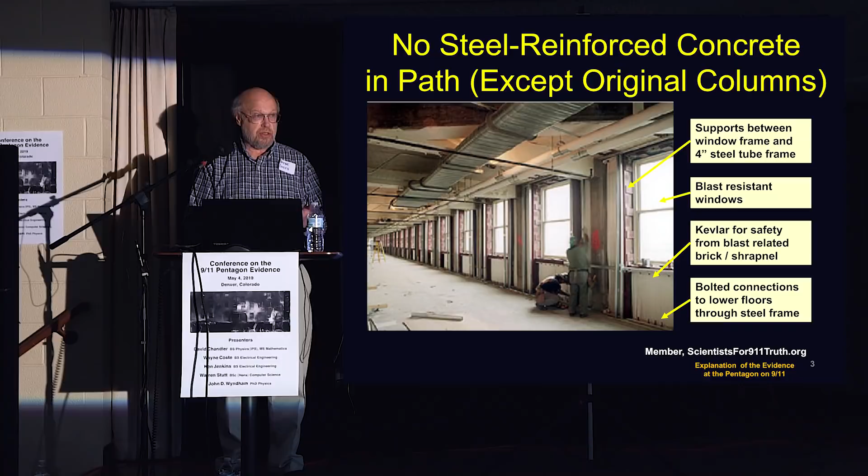The first thing I want to do is talk about the blast-resistant wall, the E-ring wall. It is a very significant piece. What the refurbishment of the E-ring was primarily designed to do, besides modernizing it, was to put in a blast-resistant wall. The blast-resistant wall was basically blast-resistant glass to protect against incidents like the Khobar Towers, in which the explosion shattered the glass, and the projectiles did the most damage to the personnel inside.

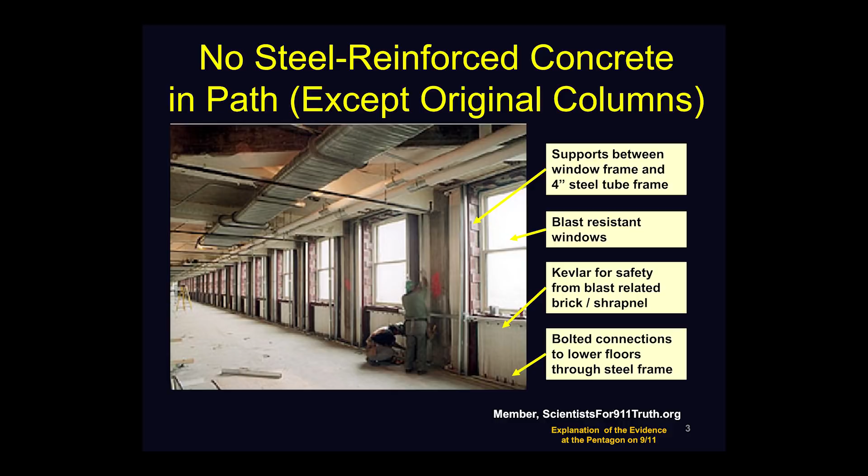So they put the blast-resistant windows in. They were supported by 4-inch steel tubes with fingers that are holding them up. You can see kind of the fingers, the little horizontal things that are pointed to in this video. They're also bolted from one floor to the next, like window frame, whole entire frames that are put in place and then bolted using threaded rods down to the next level down. That's how they used that for lateral support. It was designed against an exterior truck bomb, not an incoming plane.

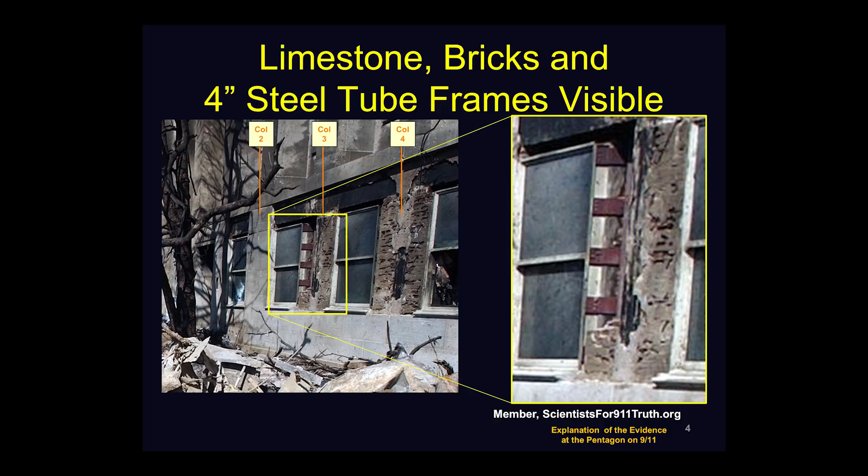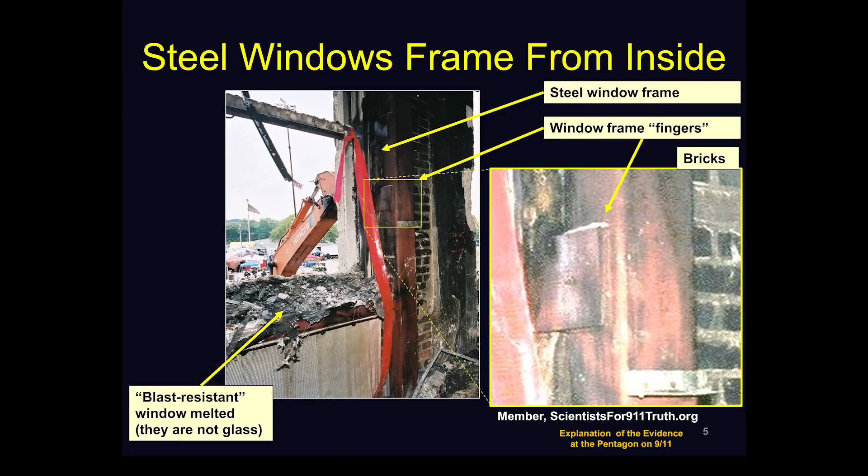Here is a post-impact picture of about columns 2, 3, and 4. You can see one of the window frames, and I've highlighted the fingers so you can see what they look like. This is typical. If we go on the inside, this is a second floor window. You can see the glass is melted, and if you look on the right-hand side, you can see the finger that's there. You can also see the infill brick. There's no steel reinforced concrete anyplace in this entire path, as was mentioned before, going from the E-ring all the way to the C-ring. It was just the 1942 era steel and rebar columns that was obstructing the path of the plane.

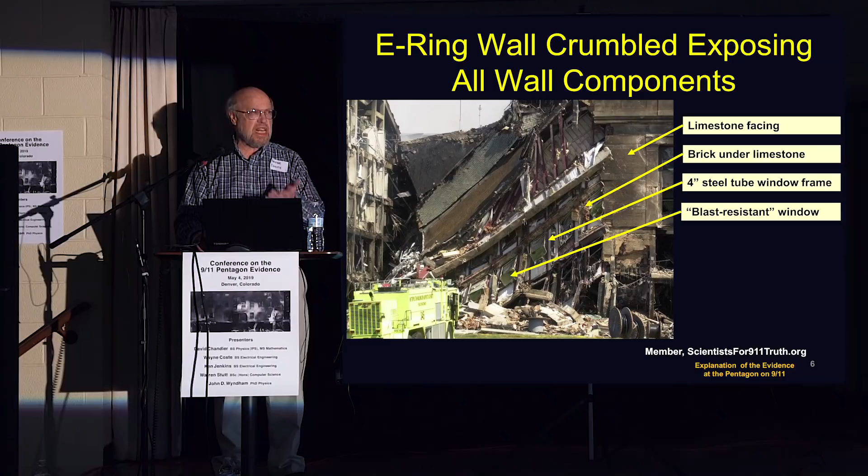When I used to bemoan the fact that the wall had collapsed and it was a pile of junk, you can't see anything, there's nothing there, there's no information. But that is not true once you look. Once you know what you're looking for, you can identify. First of all, we got the limestone facing. We got brick under the limestone. We've got the 4-inch steel tubes that are clearly visible. You see the blast-resistant window. It's all there. It's just kind of not in the right place, the original place. So it's all there. You can see it, and you can see that there's no steel reinforced concrete, no concrete at all in this area. The only place there's any concrete is in the stairwell.

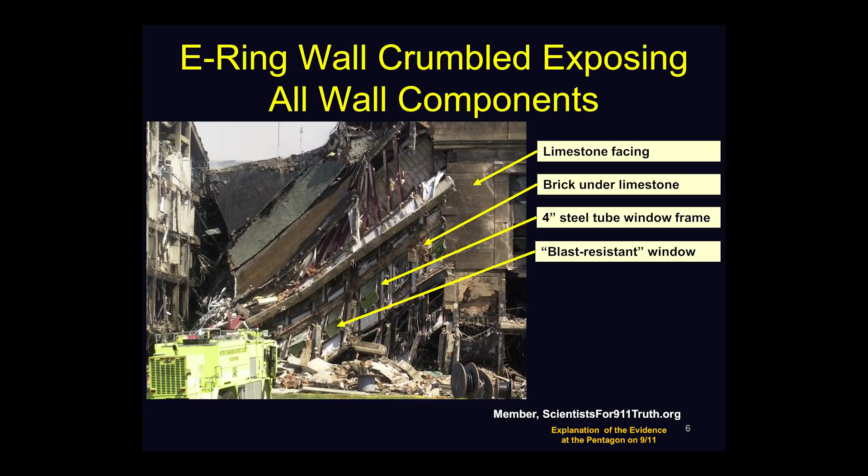Appears to be in the stairwell, which is that blank wall on the right-hand side at the right side of the collapse. So a little bit of orientation.

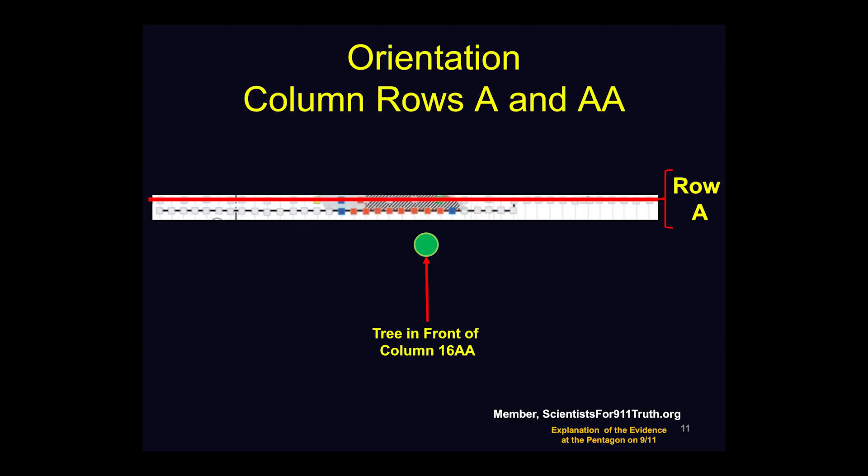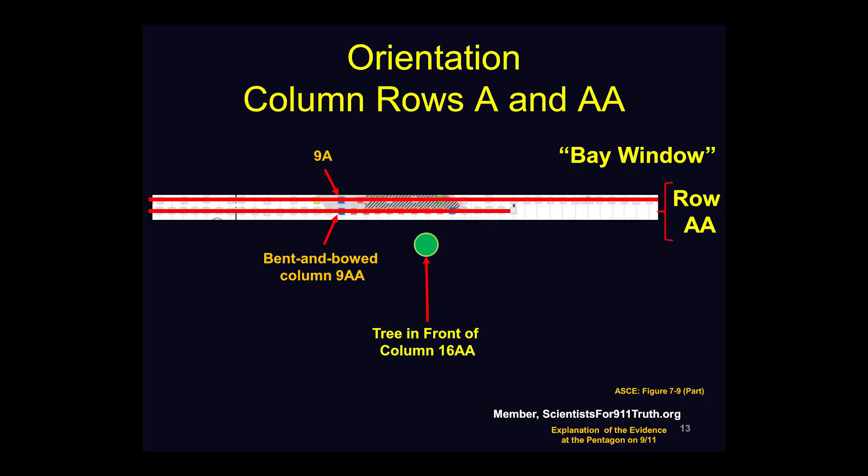This is row AA, and I'm going to just highlight a couple of columns we're going to talk about. Column 9A, which is in the second row, the bent-and-bowed column 9AA. There's a column that is severed and hanging called 10A, and then there's two at the right side of the plane impact area, 18AA and 19AA. So those are just giving you a little bit of orientation.

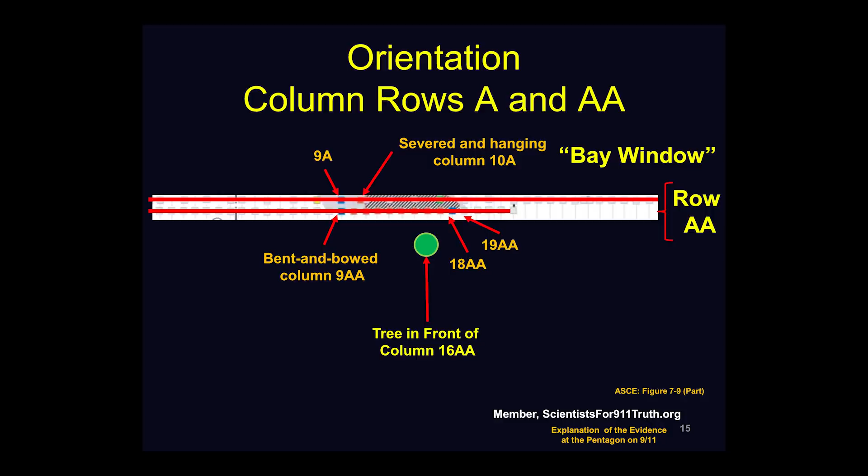And again, we've got the generator, diesel generator trailer, the retaining wall, and the tree in front of column 16. I'm going to be talking about the tree at column 16.

The tree was there, photographed in many, many places, but then it disappeared from memory. Once 9/11 happened, no one even knew it was there. It wasn't until I saw, must have been about the 20th time, the comment that, oh, there's a stump. What stump? What's a stump doing there? So I looked into it.

And over the course of 6 months or a year, I finally figured out how I could explain what happened. Nothing is obvious with the photos that were there, but once you see it, once you can explain it, it's there. So here's the plane approaching.

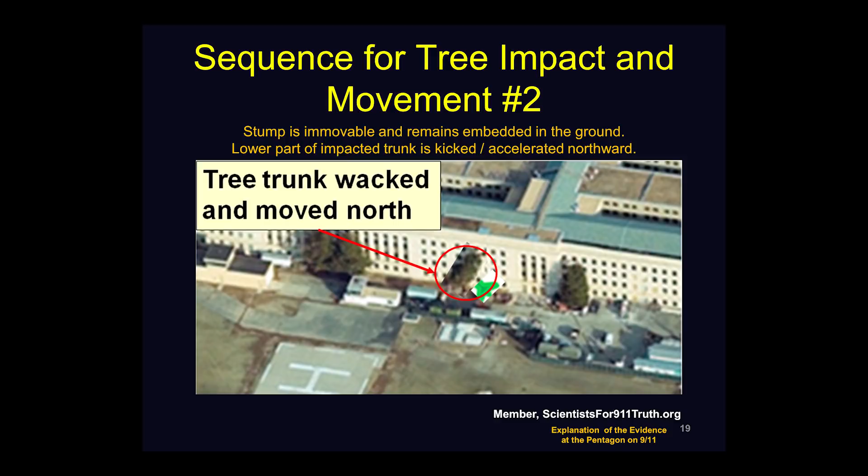It's going to hit the tree and sever it between the fuselage and the right wing. The tree is going to get severed. The trunk is going to get whacked. It's effectively going to hit the wall and kind of bounce back through the plane, dragging along some parts of the plane.

The moving mass of the trunk, with momentum, is going to be dragging the top of the tree and everything to the right, and it's going to end up about as far as column 5.

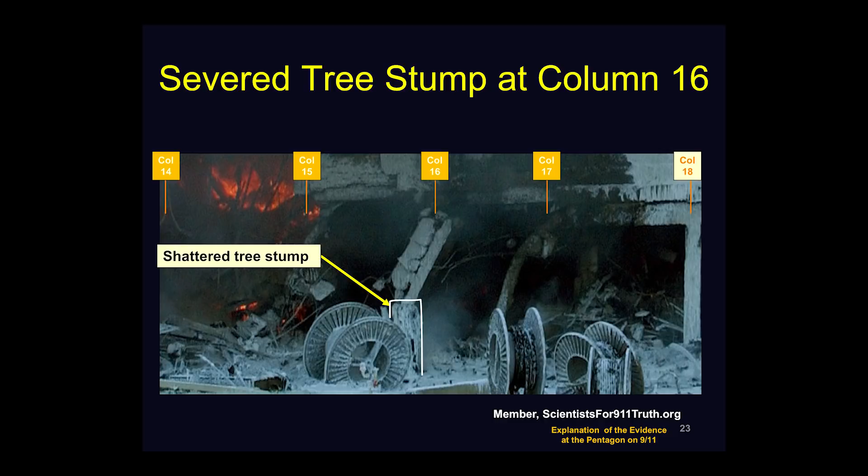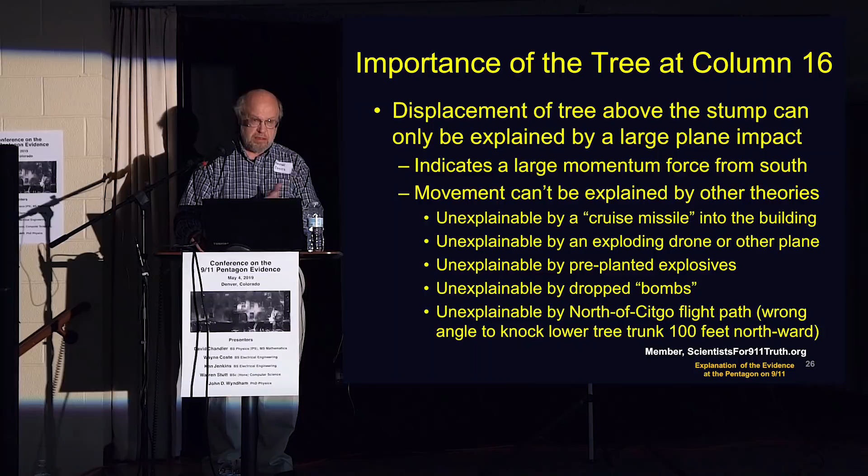So the importance of the tree at column 16 is that the displacement can only be explained by a large plane impact. The movement of this tree can't be explained by the other theories. It's unexplainable by a cruise missile, exploding drone or other plane, unexplainable by pre-planted explosives inside or outside, unexplainable by dropped bombs, unexplainable by a north of Citgo flight path, at least the version that hits the Pentagon, because it would pin the tree to the wall and not kick it to the north because it's got the wrong angle on it. So I'm going to go over the plane approach.

You've actually seen this type of stuff with the other presenters. But what we see here is the plane's coming in. It's going to hit the diesel generator trailer.

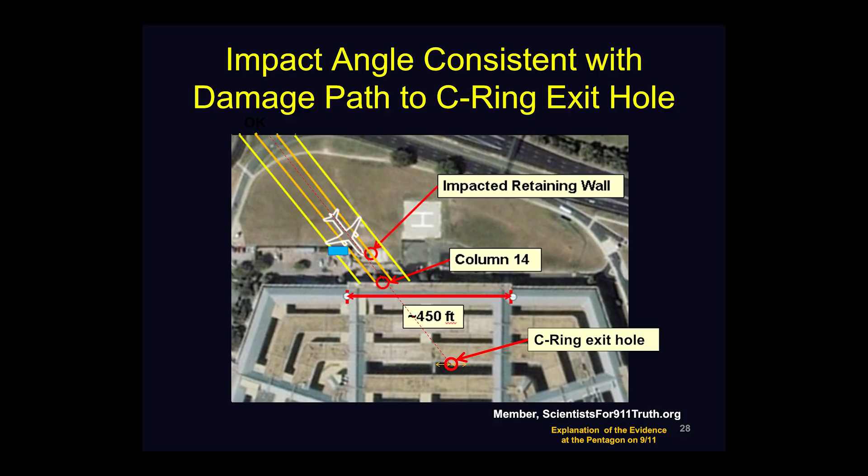If you follow it, you go to the C-ring exit hole. Everything kind of lines up, as you've seen before. But here's the diesel generator trailer getting hit.

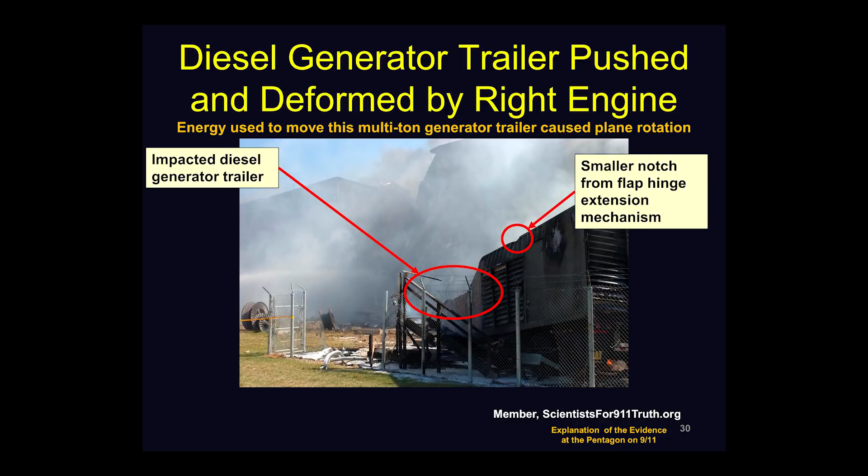You've seen this before. I've got the small notch that David had just alluded to at the top. If you take a look at the left engine that now hits the ground at the retaining wall, it takes out a gouge. You've seen this before.

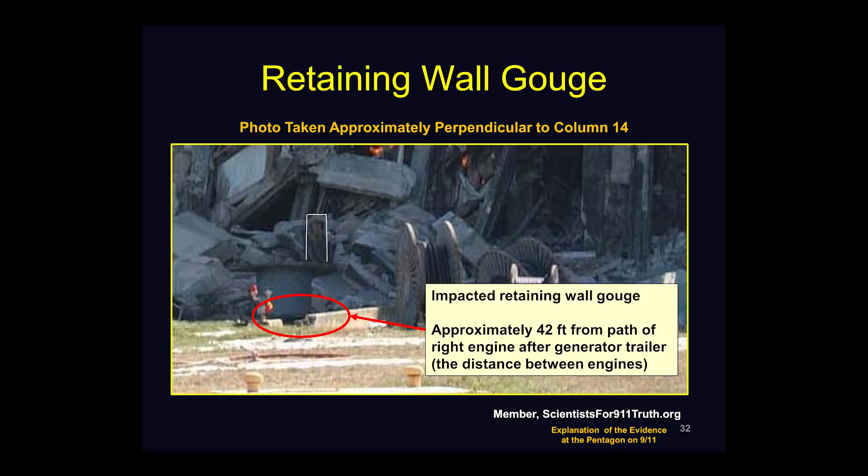I started to accept the possibility of a large plane impact when I was putting together a series to describe the four different competing theories for what happened at the Pentagon, and my intention was to ridicule a large plane impact. It wasn't part of my vocabulary then.

But the fact that made me stop was that this is 42 feet from where the generator engine, the area where the generator trailer would have hit. And that made me stop. Who could arrange this stuff and fake it this well? I had to at least start looking a little bit harder.

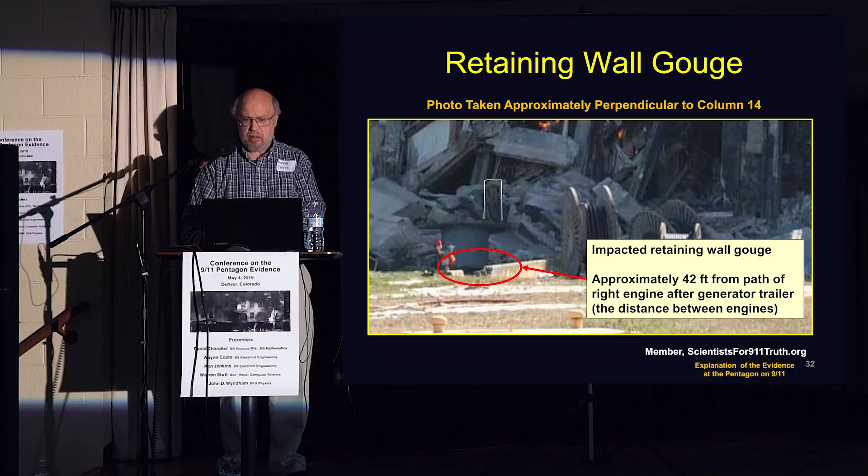And so this is the picture that got me going, this one in the dimensions. So I'm going to take a look at the plane impact onto the facade.

First of all, we're going to see the right wing is going to be impacting above the second floor slab. The tree stump we're going to use to set the height of the wing spar between the fuselage and the right engine. The left wing is going to impact entirely below the second floor slab, and that's documented, memorialized by the bent and bowed column 9AA.

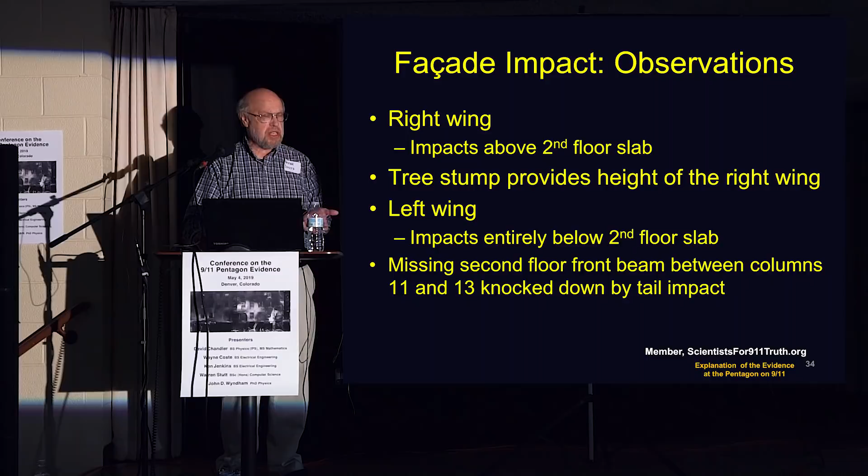And we're going to also look at this missing second floor front beam that's between columns 11 and 13 that was taken down, it appears, by the tail impact as the tail is dragged in.

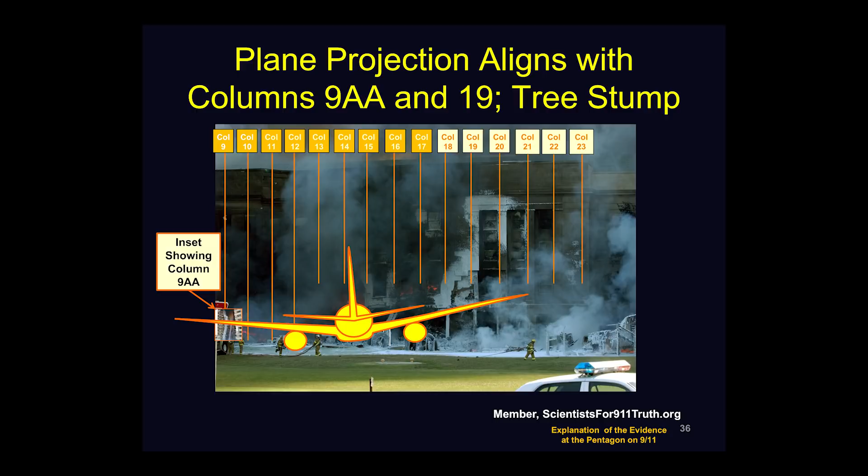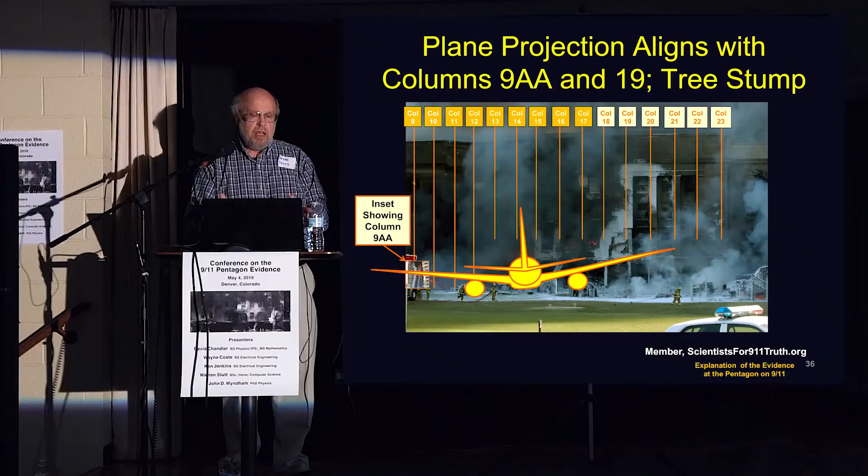I took the width of a 757, put it in at the right angle. I reduced the angle a little bit to 52 degrees, to account for the yaw rotation that we'll talk about a little bit later.

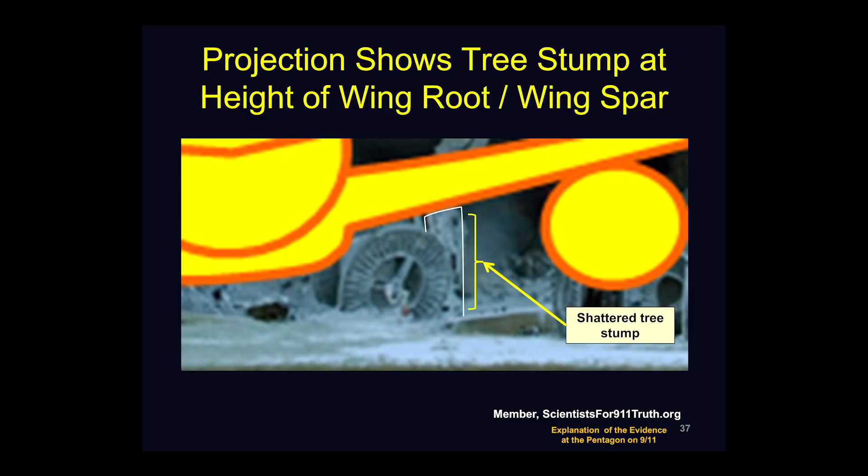And so here's the shattered tree stump being used to set this part of the image for the wing between the fuselage and the right engine.

On the very right-hand side, what you see is there are some bashed-in columns and knocked away limestone that sets really the height of the wing at column 18, at the intersection of the slab; column 19 about a foot and a half or so above; and column 20 about 3 feet or so.

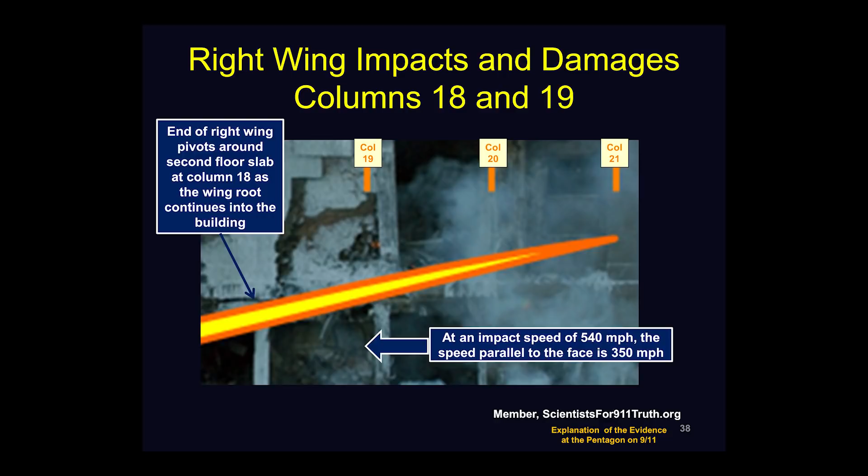Column 21 is missed, and so that's where I determined the end of the plane would be.

So on the right side, what we're going to see is there's bashed-in columns on 18, 19, and 20, evidence of a large momentum impact, and again, it can't be explained by exterior explosives, interior explosives, or cruise missiles. As a further comment, both engines' impacts are approximately horizontal, so there's no seismic activity, as the plane's energy is being absorbed column by column over some time.

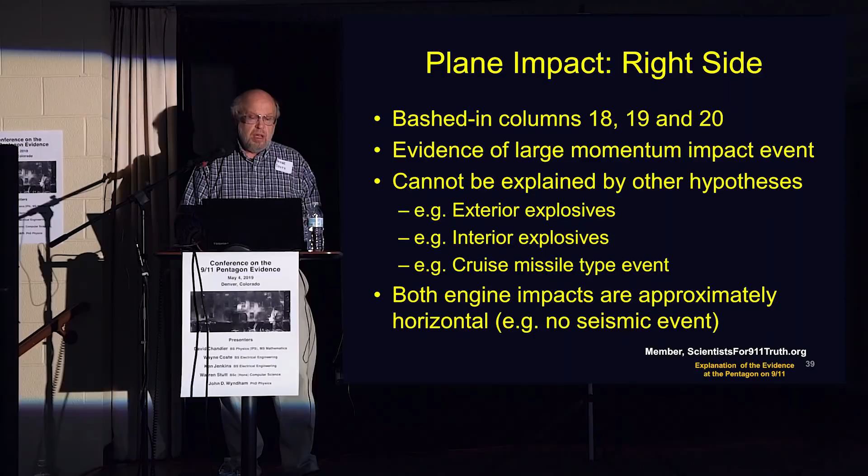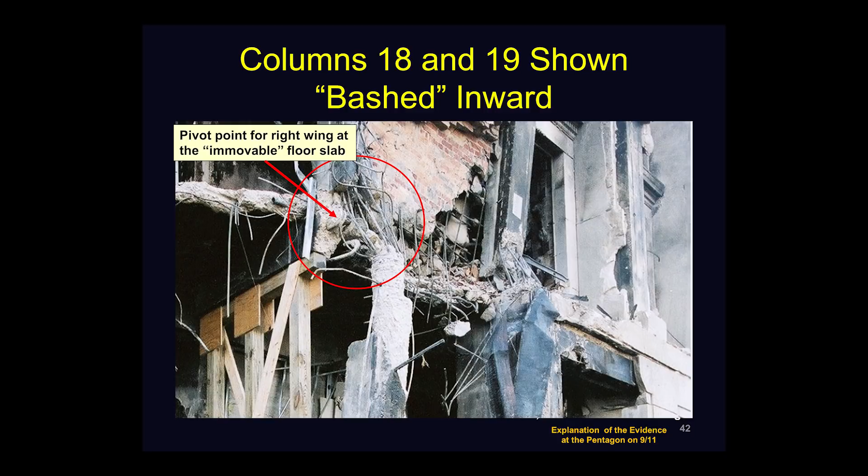Here's another view of it. You can actually see how far it's been pushed in, and you can see the rebar is still attached to it. And then on the left-hand side, you can see column 18, which has not only been squashed and bashed against the slab and destroyed in that way, it's also pushed to the left.

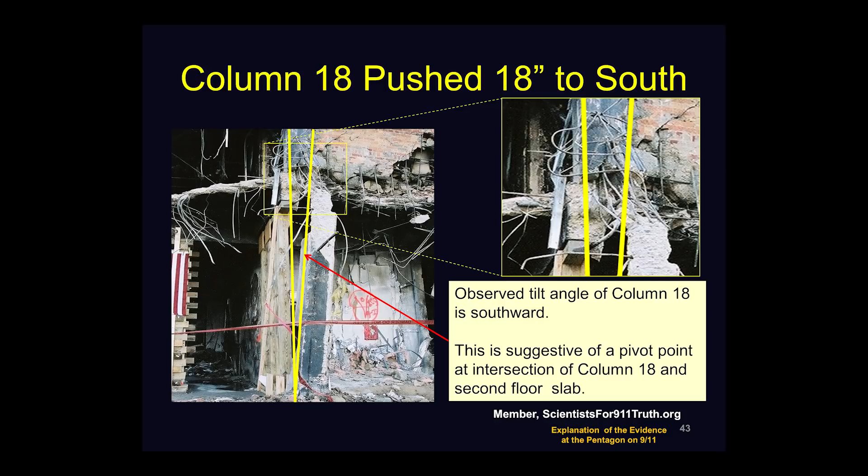Here you can see that it's been pushed to the left, a couple of feet, a foot and a half or so at the top. And on the inset, you can actually see the spaghetti-like rebar is pushed to the south.

This indicates that it's a pivot point for the right wing. Now let's go to the left-hand side. The plane impacts the facade.

The left wing impacts the middle of the first floor between column 9AA, which is the last impacted column, and it's not destroyed because the plane is decelerated. It's the light end of the wing tip, and so the column is able to actually resist it, and the wing then has to rotate around it.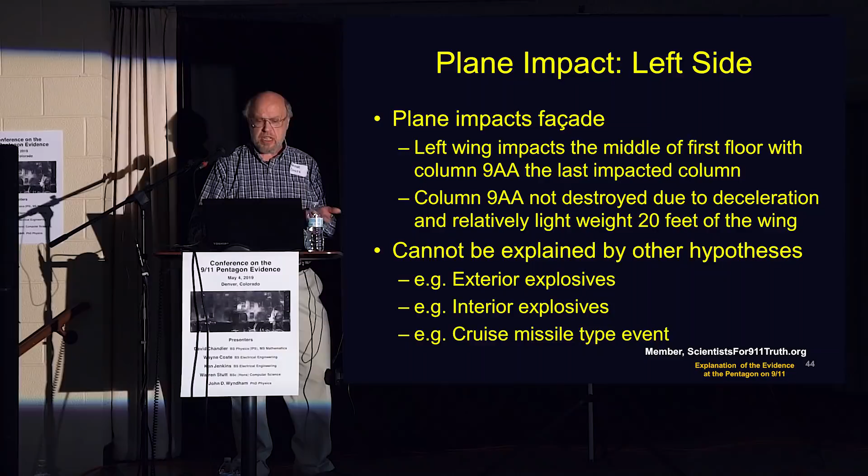And the damage to this column can't be explained by interior explosives, exterior explosives, or again, a cruise missile event. So here's column 9AA, inset at the height of the wing, about halfway up, between the ground slab and the second floor slab, and it's bowed in, not destroyed.

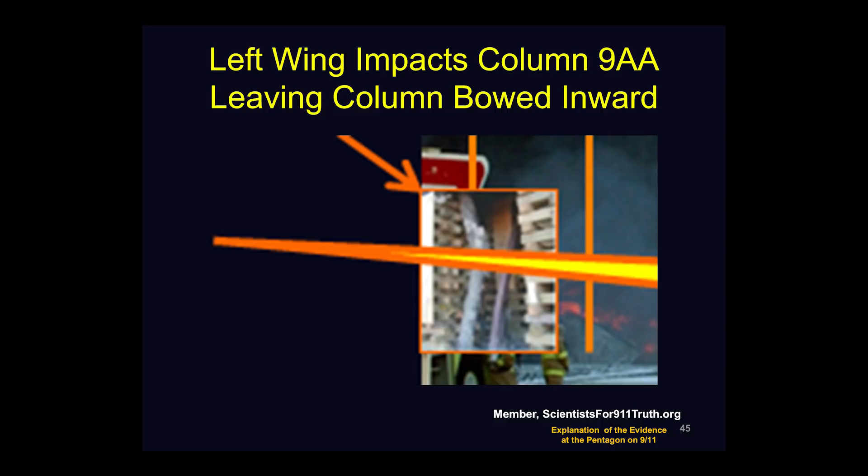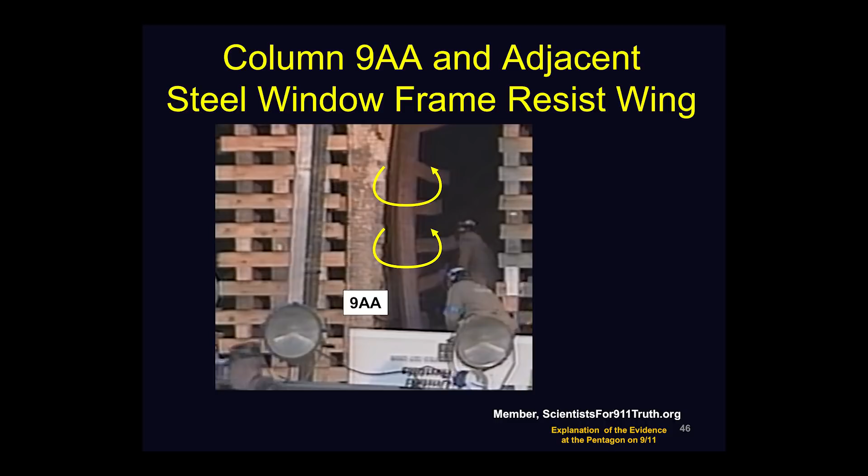Here it is. You can't see the bow-in part here, but right next to it is a steel window frame that's got those little fingers on it. Those little fingers used to point out towards the lawn, to hold the window frame in. But in this case, they're rotated about 120 degrees. So something has come in and rotated it.

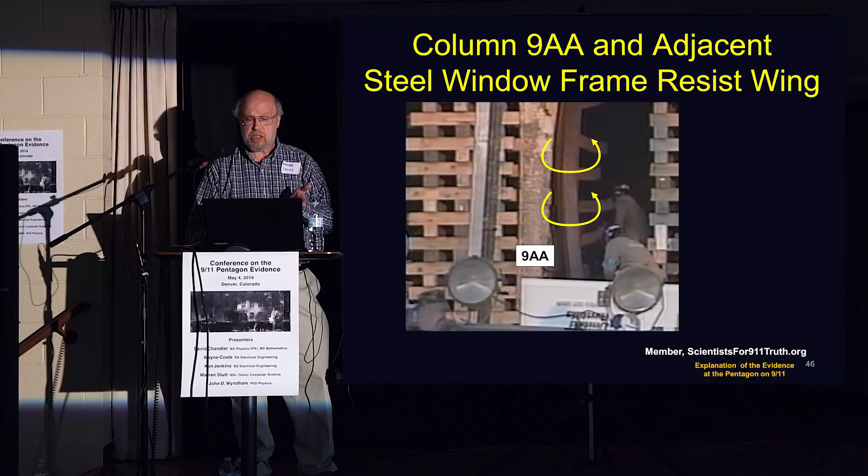So let's talk about the yaw motion of the impact sequence. What I did is I said, you know, I'm an airplane, I'm going to go hit a couple of things.

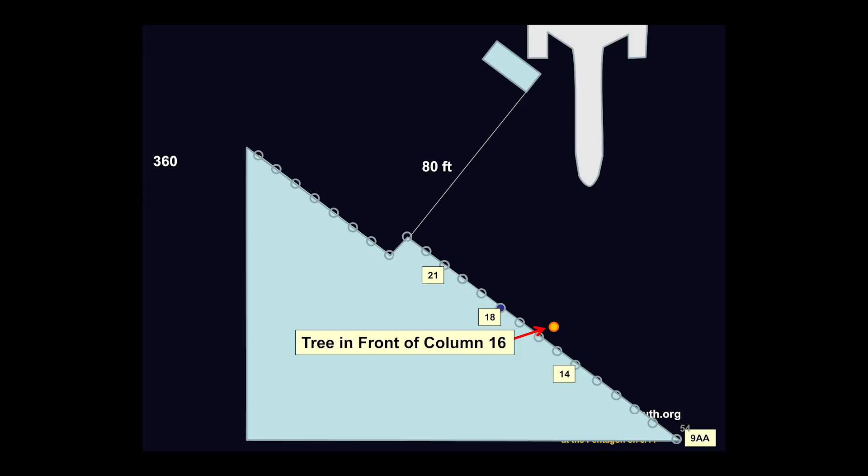Going back to basic engineering physics or engineering mechanics, what's going to happen to this free body? What we had is the 100-ton plane hitting a 20-ton or 40-ton trailer and moving it. So there's going to become some yaw motion. The plane's going to start to twist in the air, some yaw motion.

And we're approaching the tree in front of column 16. I'm going to hit it halfway between the fuselage and the right engine. The right engine's, or the right wing's, going to also impact at column 18. The tree has now been slammed against the Pentagon facade.

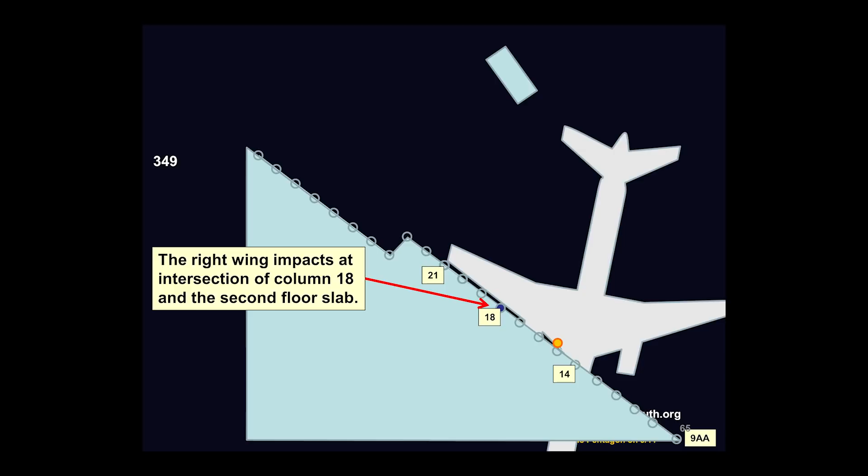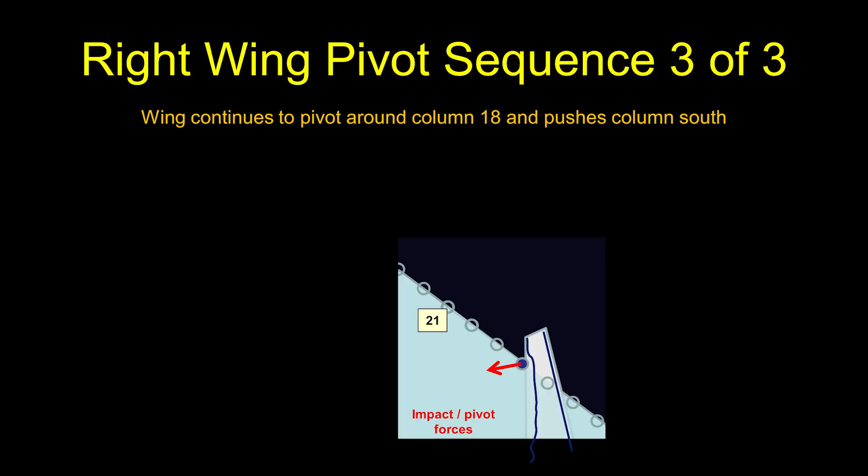Here's the right wing pivot sequence. The red arrow shows the forces being pushed towards the inside of the building, but it can't go very far because it's up against the concrete slab. And as it pivots around, it has those forces that push it towards the south.

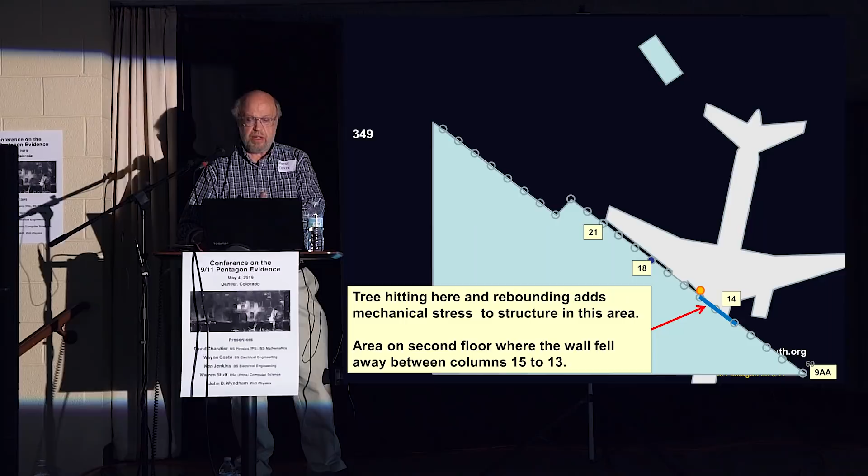Here's where the tree has hit the Pentagon at column 13. As it hits it here, it's created a lot of vibrations, a lot of energy. If you've ever chopped down a tree and watched it fall, there's a lot of energy in a tree falling or getting pushed. So it added a lot of energy to this particular location.

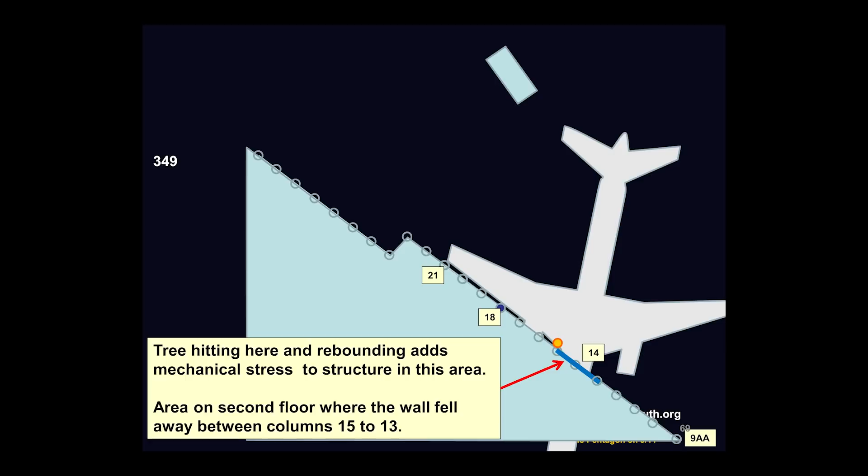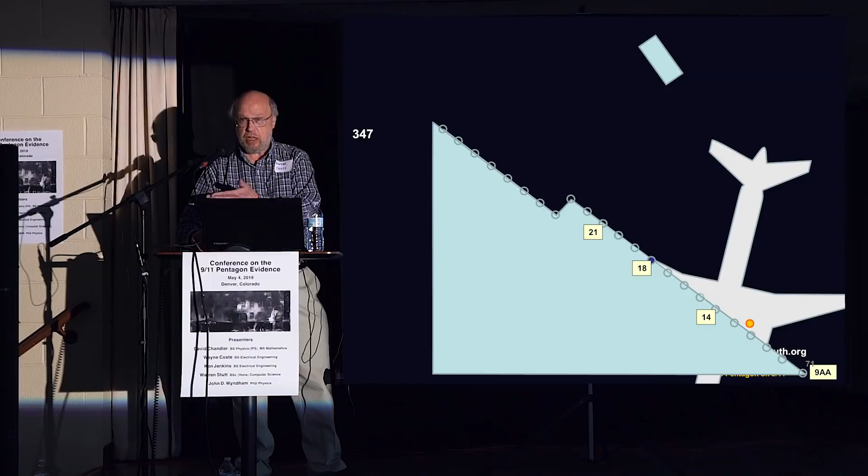My hypothesis is that it broke loose the two window frames in this area. And then the tree continues tearing through the fuselage, dragging some of the larger aluminum shell components that are seen on the lawn, as well as the overhead luggage rack.

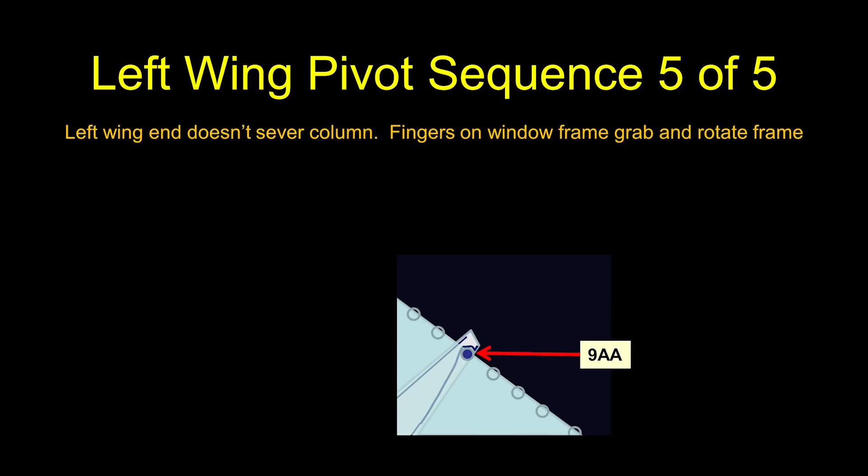And then we hit column 9AA, and then we watch column 9A. Notice that in each of these wings, there's a rear structure—not just a leading wing spar, but a rear spar. And it will keep everything more or less together as it's flowing, getting dragged and rotated around these things.

And then the tail's going to continue going in, and it hits about column 12, and does damage between 11 and 13, which we'll talk about here.

So this is Will Morris's photo, and what we see is the northern end here. We're going to zoom in, and what we have here are the two windows from column 13 on the right, to column 12 in the middle of the two windows, to column 13, 12, and 11, sorry.

You can see all of the bricks have fallen out. Down below, I've shown what a beam looks like on the left-hand side, and on the right-hand side, the beam and the bricks under the window have all fallen away. The thing in the back looks like it's just the Kevlar backing that you would have seen in the very first couple of slides.

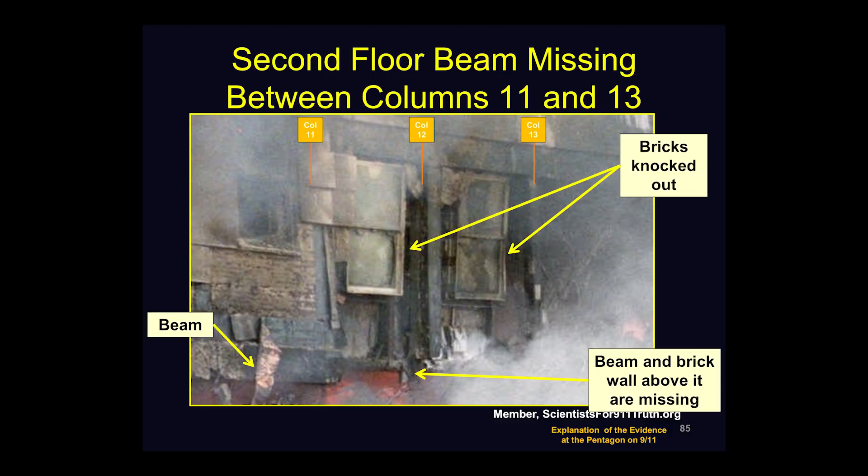The size of the hole is one of the misconceptions. When I was first told that there was a 90-foot hole, I went into tilt mode. This was probably about 2010 or 11. I couldn't fathom it because all my 9/11 videos said it was an 18-foot hole.

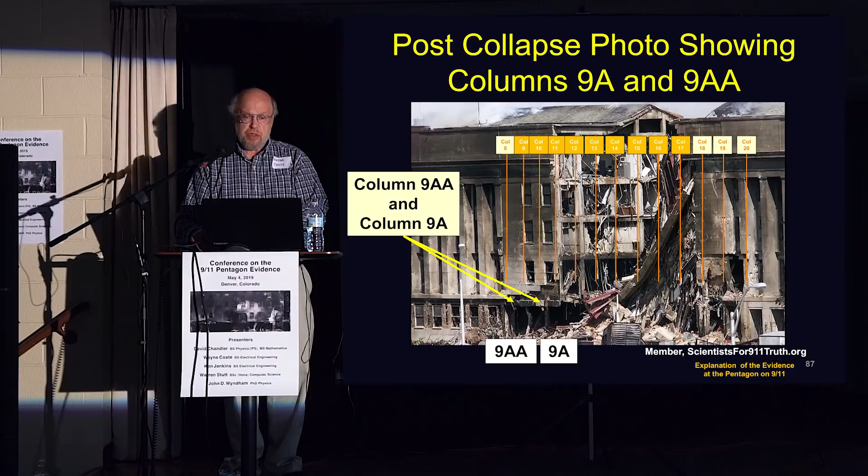What we're seeing here is one of the photos that's going to be used to make a composite, so we can take a look at it a little closer. But it needs a little explanation. So here I've got column 9AA and column 9A shown in this angle photo. You're probably about 45, 50 degrees south as this picture is being taken.

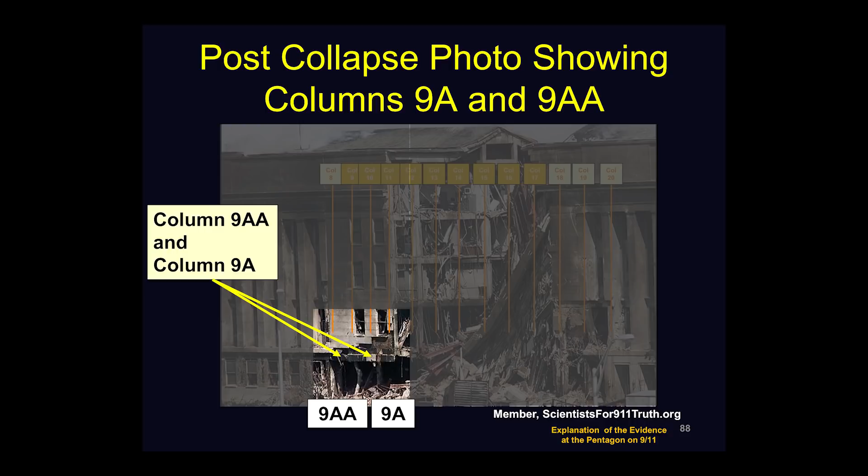If you only highlight it in this particular little section, this is what's going to be carried into the composite photo. And here's the composite photo, in which you have column 9AA and column 9A. Those are the ones that were used to make this composite, to show that there's really nothing from column 9AA over, except it looks like column 9.

You know how long it took me to figure out that this was column 9A and not column 10? A long time. And so I can really understand just how difficult it is for most people to get their hands around it, because there's so much bad, inaccurate material that's out there.

But I've looked at this, and again, if you find an error in what I talk about, let me know. It's the worst thing you can do for me is tell me that I made an error. And of course, I'll do my best to correct it and acknowledge it.

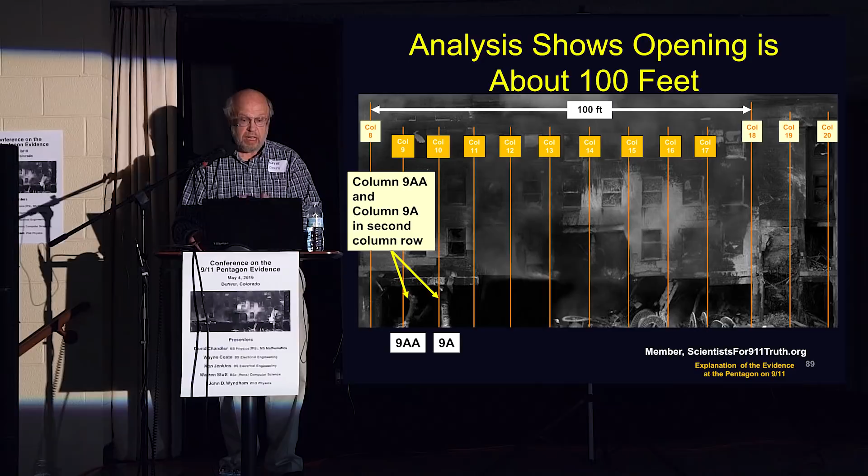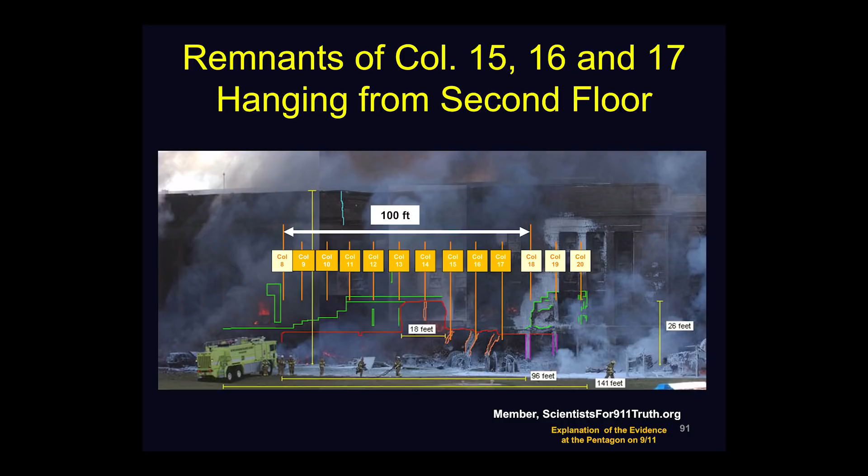So this is the photograph that was used to support the 18-foot opening. In reality, we've got this 100-foot opening, 100-foot missing facade, 96 feet of continuous opening of the columns. There's still some stuff that's hanging down, as you can see by the highlighted orange. We'll talk about those.

They were hypothesized by some to come out of the ground and be exploded outwards. But if they did that, they would start right where they're located here, which is not a very appropriate place for columns to be, because then that would mean that they would go straight up from there. And it would do two things: it would go through the middle of the windows, and secondly, it would mess up the columns every 10 feet, which is what all the engineering documents show. So it doesn't look like that—it looks like they're actually hanging.

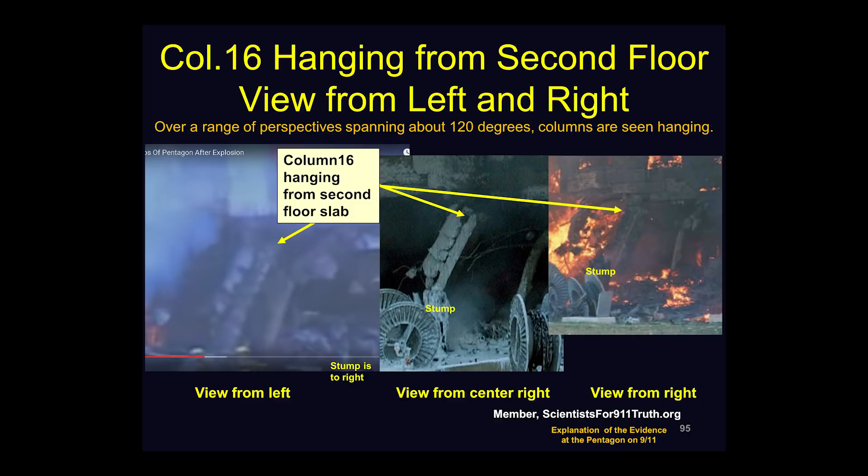Here's a photo of column 16, the largest of those, shown from the right-hand side, from about straight on, and from the left-hand side, from one of the two video cameras taken right after 9/11 by amateurs. So you can actually see it from all the different angles, and it's hanging.

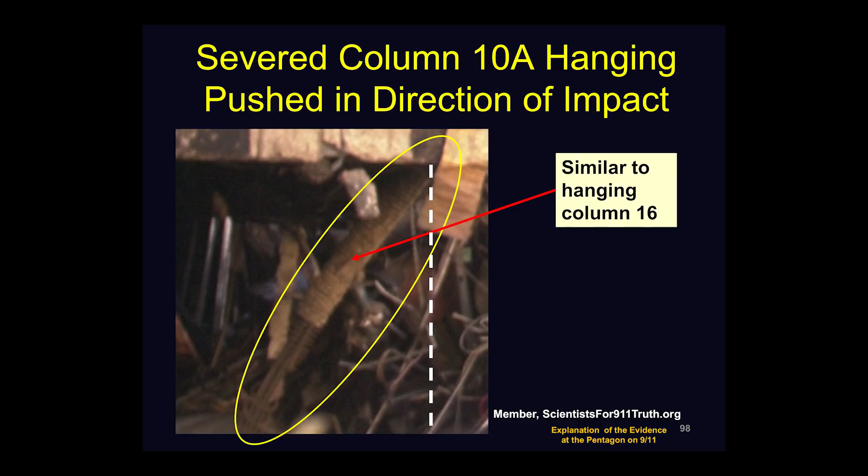There is a similar column, 10A. I mentioned I talked about this one. This one's hanging, it's been severed at the bottom. It's at this angle—this is what the arc of it kind of looks like. And if it had been standing straight up and down, unsevered, it would look something like it would be in this location, but that's not where it is. So this is very similar to the column 16 that we were just talking about.

And if you go take a look at columns inside the Pentagon, take a look at the photos, some of the interior videos, you'll see that there are columns just like this one inside. So there's no intact columns visible anywhere. You can change the contrast, the coloring, all this stuff of this particular photo, and you won't see anything except fires on the inside. There's no columns visible that would be seen.

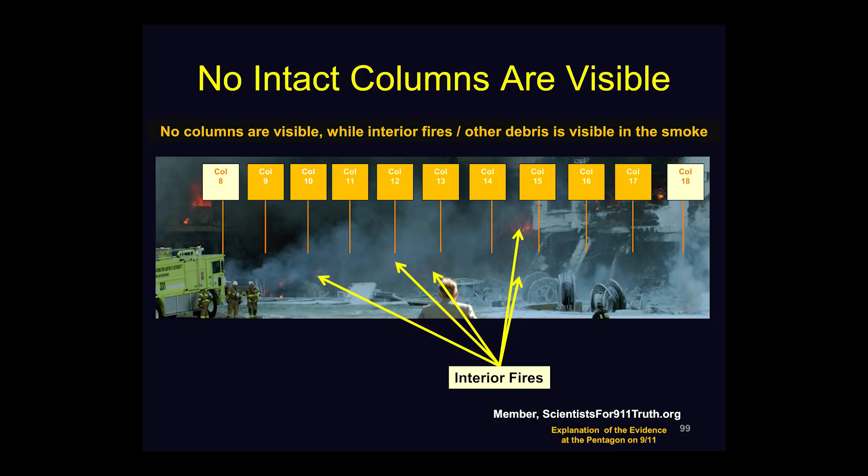And if you look from the north end again, what you see is—we can look very closely—we can see that there are no columns. You can actually see the bent column 9AA, and I'll just show you that. You can see it here, arcing in, coming on out. And so there's no column 9, 10, 11, 12, and 13 is pretty hard to see, but in this particular area, that's a good part of the opening. There's no columns that are shown there.

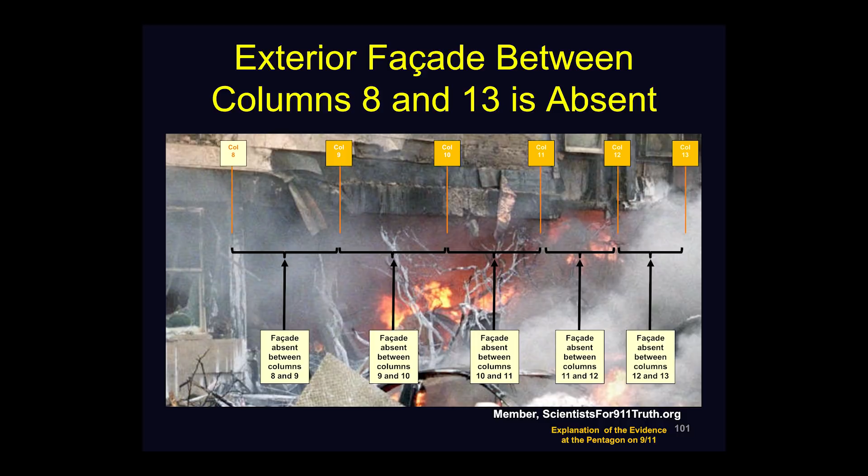And these are the burning tree branches. They're not exploded-out rebar or anything like that. So you can actually see that the trees are still there after the fire's been put out in some of the photos, and you see that, yes, tree branches.

So now let's go take a look at the C-ring exit hole.

The first two floors of the Pentagon are continuous from the E-ring entrance hole to the C-ring exit hole, with only an array of columns in between.

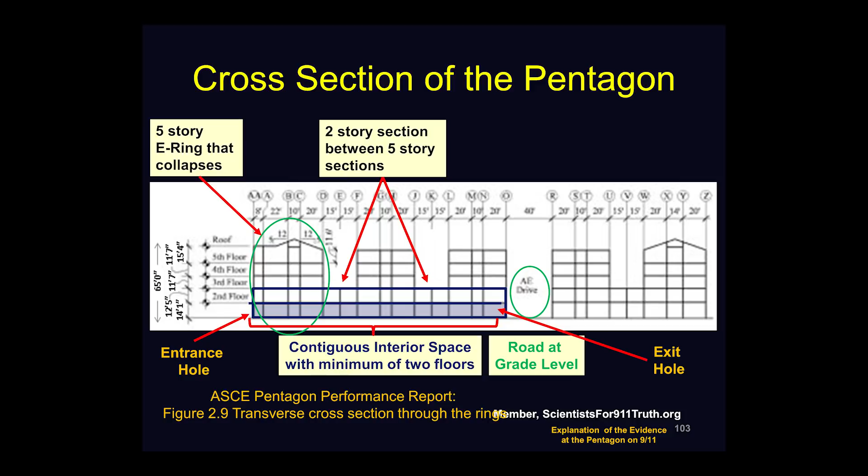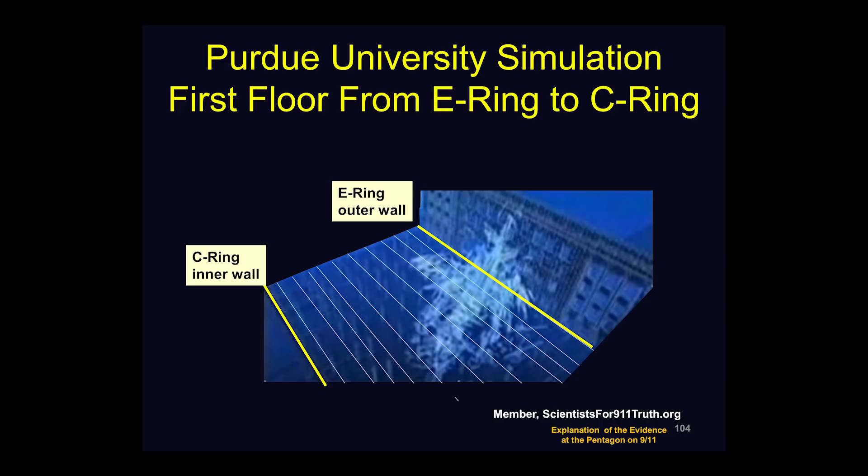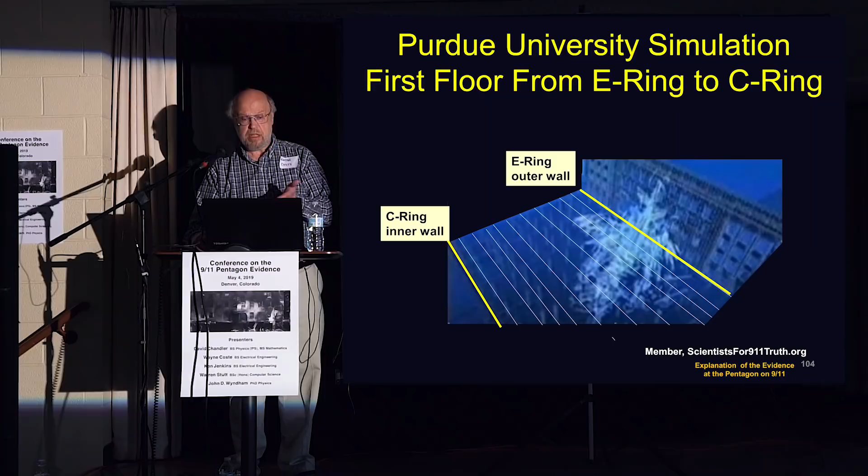This video has been used since the earliest days. It's the Purdue University simulation of the Pentagon's first floor. Some early analyses claimed this showed the plane didn't even get through the E-ring before being destroyed. But actually this is the E-ring to the C-ring, and there's no walls between them. This is all the continuous columns from the Purdue University simulation, from the E-ring outer wall to the C-ring inner wall.

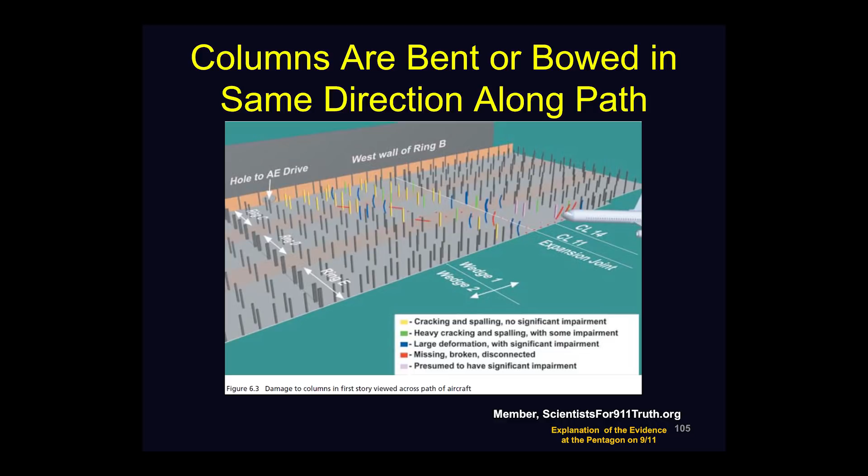Here's another viewpoint of it. The plane's coming in. It's going to be hitting these columns, knocking them down. They're color-coded to show what kind of damage they have. I'm going to zoom in on just 4 of them.

I've labeled them. There's 11E, which is basically a fine column - it's green, meaning it's still functional. 11D is bent and bowed. Then we have 9C, also bent and bowed, colored blue. And then we have 9B, which is red, like a dead column.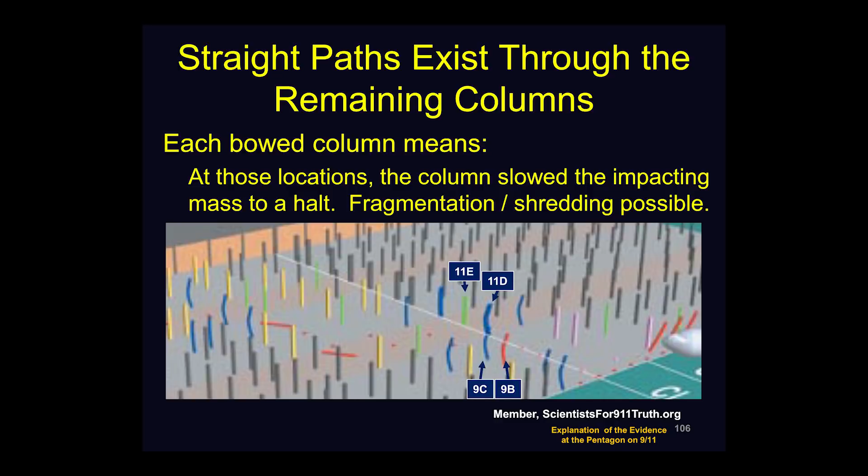So what we have here is 11E - it is intact, damaged but intact, vertical, no deformations. 11D is bent and bowed, not supporting much, but it's still there. It resisted the impacting mass, whatever it is.

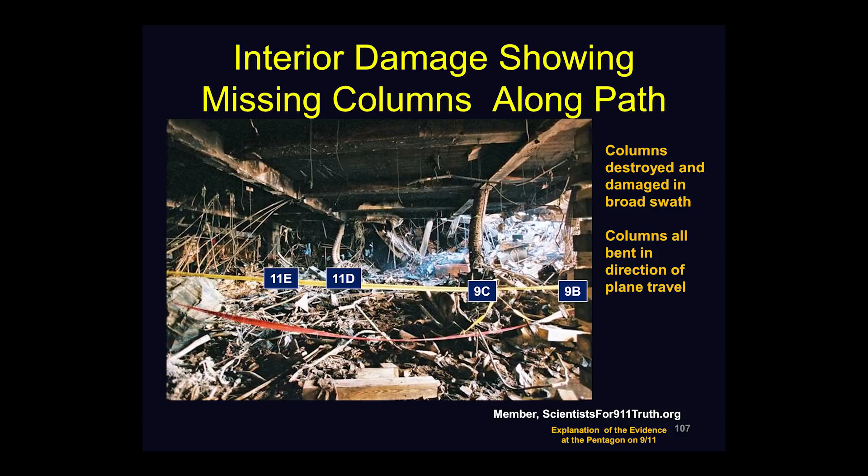Here's 9C, another bent and bowed column. In column 9, the remnant is just a skeleton of the rebar - the concrete's all been knocked off. A lot of the concrete didn't get knocked off during the impact itself; a lot of it came off during firefighting, when they hit hot concrete with a fire hose and the concrete falls off.

Prior analysis had misused the ASCE report, which had color-coded the columns and made them big so you could see them. That led to people saying there's no way you can get anything through these columns. But if you draw them to scale, this is what they actually look like.

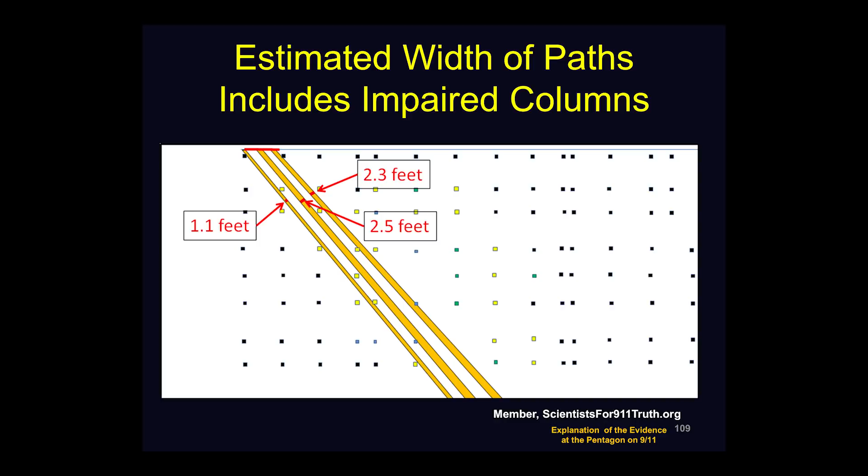You can actually get 3 paths in there, from the column, from the E-ring out to the C-ring. If you do a graphical analysis, you can see there are 3 paths: 1.1 feet, 2.5 feet, and 2.3 feet. I validated this with a wheelbarrow between some of the columns. Once material traveled through those 3 paths, those 3 channels, it would have impacted the C-ring wall - some of the material out here comes from the plane.

So if we take a look, where are these things stowed? Right in the center line of the plane. And these are the same wheel hub designs as we just saw in the debris pile in the AE drive.

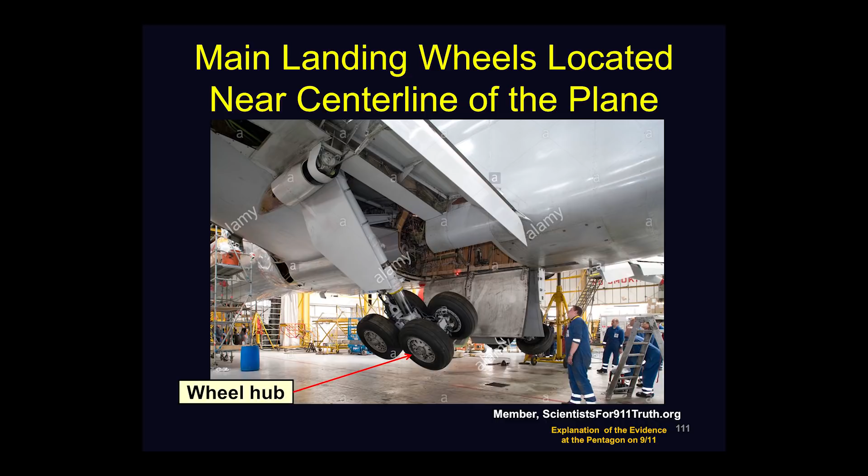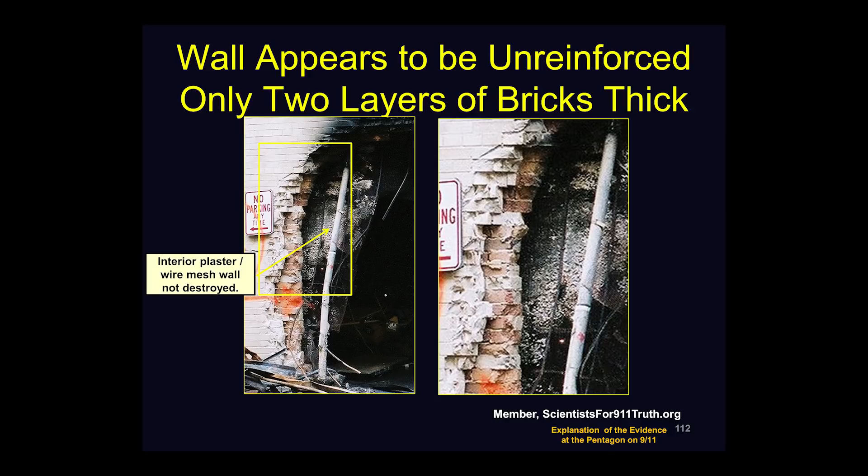The wall is only 2 bricks thick - it's an unreinforced wall, just 2 bricks thick. So it didn't take very much to knock it down. It's 19 feet wide by 10 feet high. So once it starts to crumble or have a piece knocked out, a lot of it is going to fall - and that's what you see.

And here's another picture. If you look on the right-hand side, again, you can see the 2 bricks, and you can see the plaster mesh behind it. So let's take a look at a piece of the damage, the airplane wreckage.

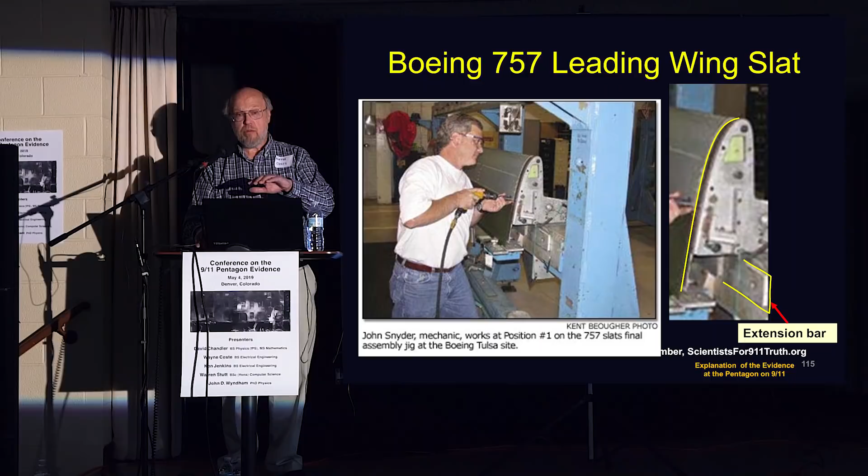We have a leading wing slat. If you've ever watched a plane take off, you'll see they have a leading wing slat to make the wing bigger and longer, and it extends out. It has this shape that you see here - I've highlighted it in yellow, and it's got an extension bar to help control it. Here's the leading wing slat that was found on the lawn, photographed here halfway between the...

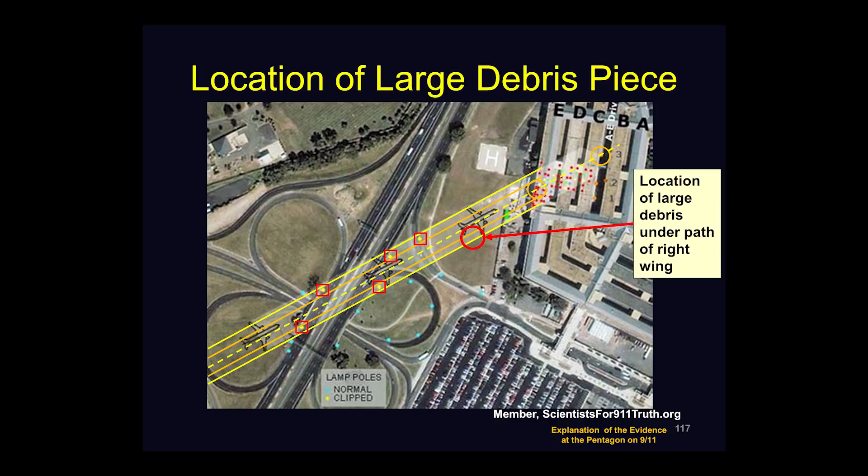I've circled here where it was photographed. It fell off someplace between light pole number 3 and the impact point on the wall. It's possible that it could have been moved from someplace, but it definitely was before it actually would have gone inside the building.

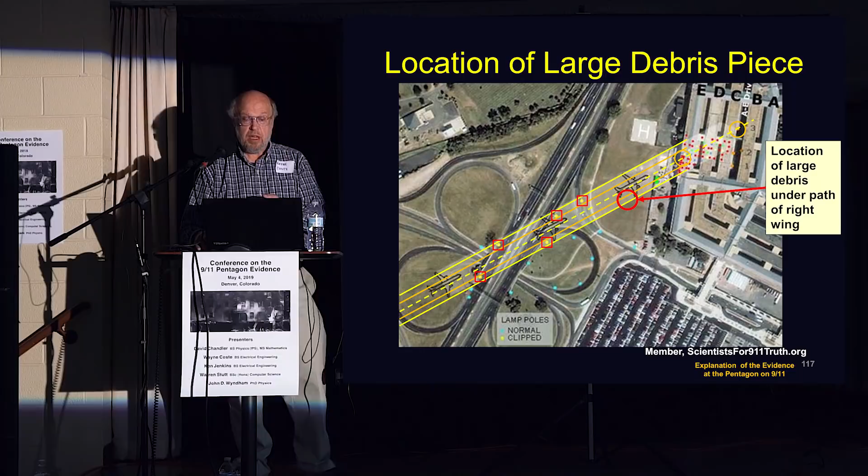So there's also light aircraft debris that's been seen everywhere, and it's been dispersed. I want to talk about one of the areas where I get a lot of pushback from. It's called a trailing air mass.

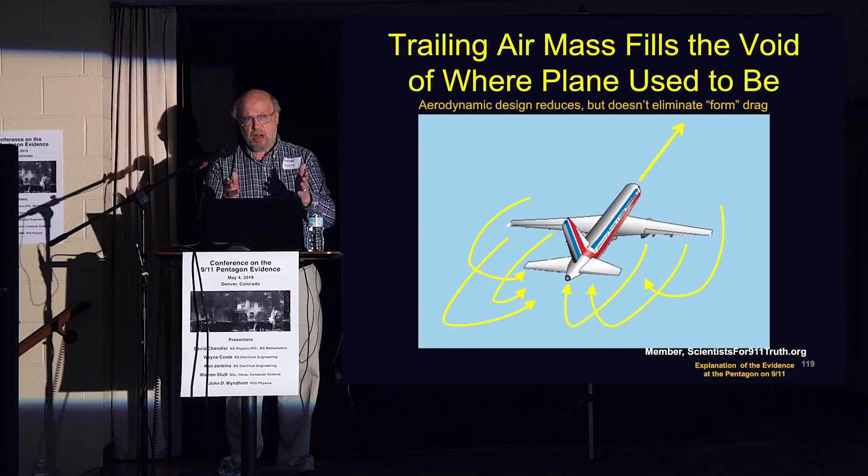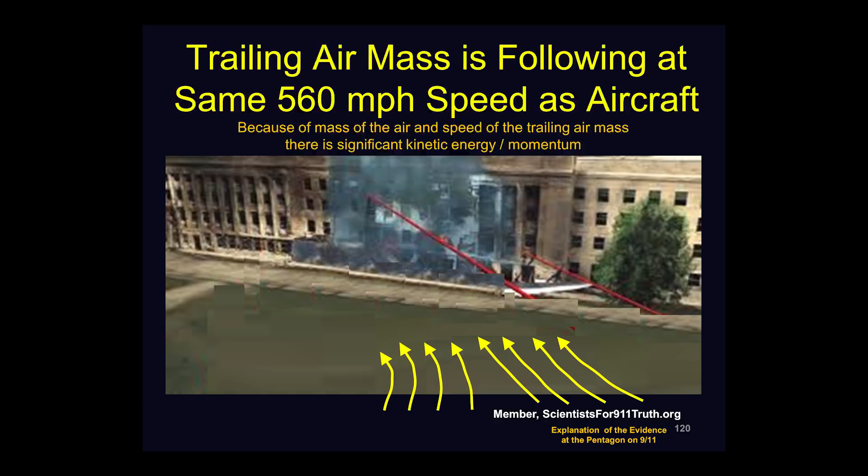So I just want to go through a little basic physics. If you move a plane, if you move anything, it pushes the air out of the way, and air has to come back in. If you're traveling at 200 miles an hour, 400, 500, up to the speed of sound, the air is going to be coming in at that same velocity right behind the object. So as the plane is approaching, it is dragging along this air mass. As the plane impacts and goes into the building, some of the air tries to follow in.

There are many accounts of people inside the building talking about the winds. Now, high explosives create huge pressure waves that do the damage - they don't create winds. But people talk about winds, holding up their hands to stop a door coming at them, or a whiteboard coming across the room, things like that. They talked about the wind.

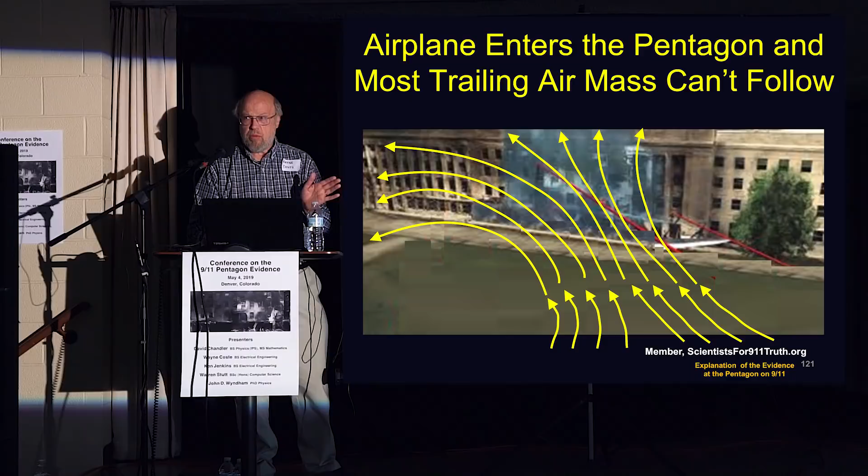And that is this air that had followed the plane in, pressurized the building, but on the outside, not all of it can get in there, so it goes up and over, carrying debris up into the courtyards and other places around the Pentagon, and to the north. A lot of the trailing air mass seemed to have gone to the north, and that's what dragged a lot of the debris - the trees, the branches, the light debris that was seen north of the heliport, on the heliport.